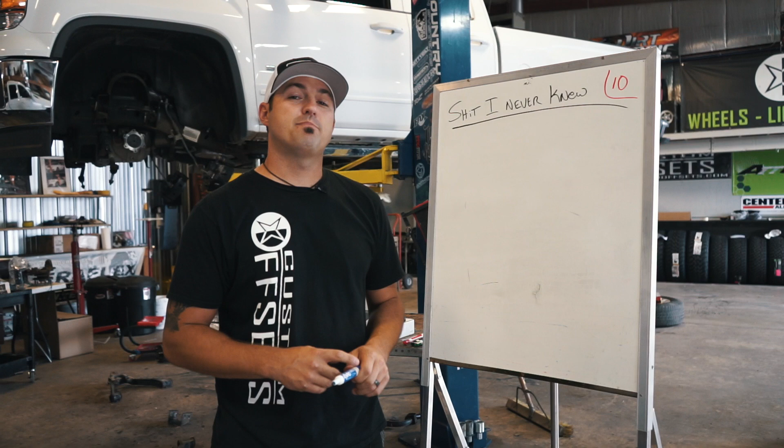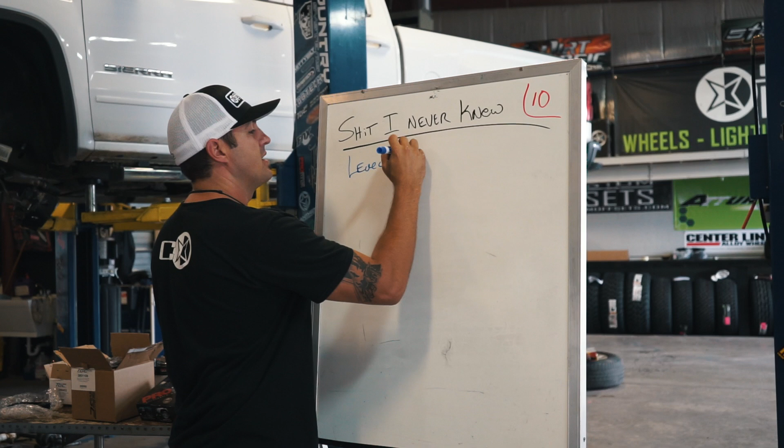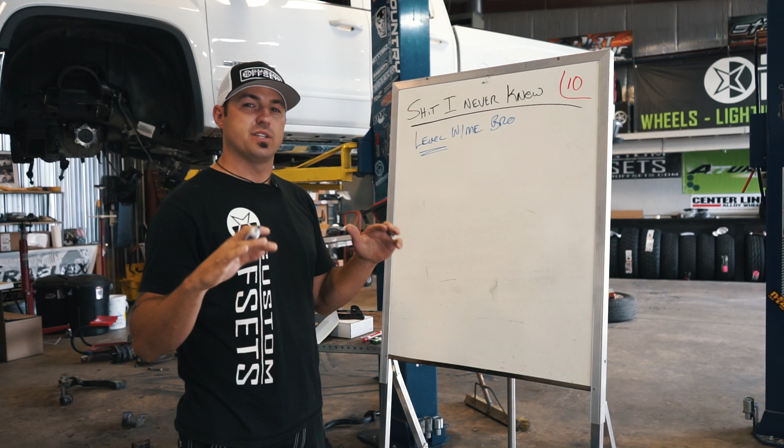So this is episode 10, and we're going to call this one Level With Me, Bro. This is going to be all about level kits. We do a pile of these, and it's been super popular that people are leveling, especially with the Chevy Silverado 1500s, so that they can do 10 wides and 33s with a little bit of trimming. So we're getting a lot of questions around what is a leveling kit, how does that even work, how high can I actually go? We're hoping this is going to help.

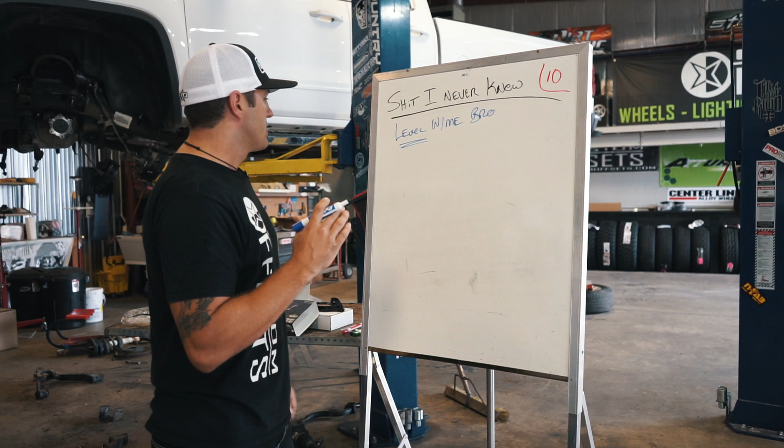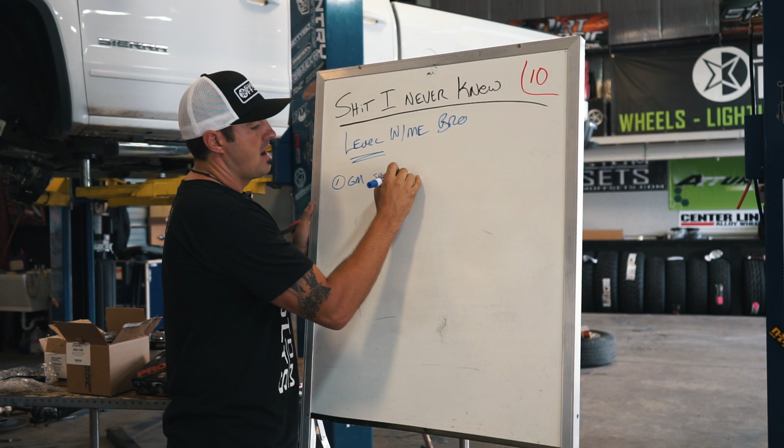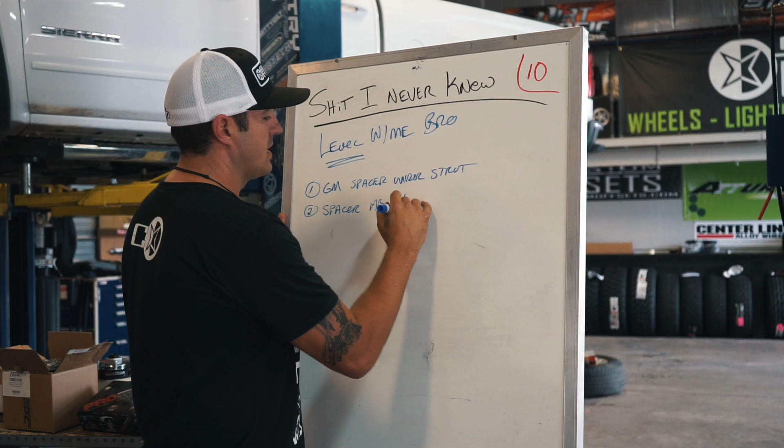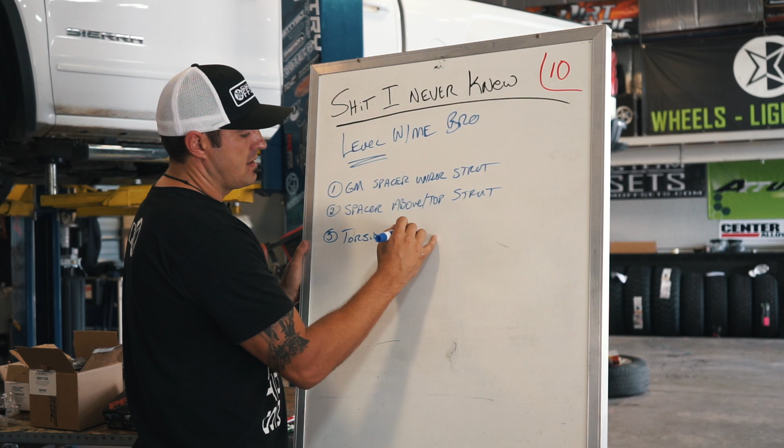So there's probably three major ways to level. One would be just for GM, and it's a spacer under the strut. There's another that's super common in many of them, and that's a spacer above or on top of the strut. And then for the older trucks and a lot of the HD trucks, you're going to have torsion keys. A lot of people call those the duck head style keys. So those are the types.

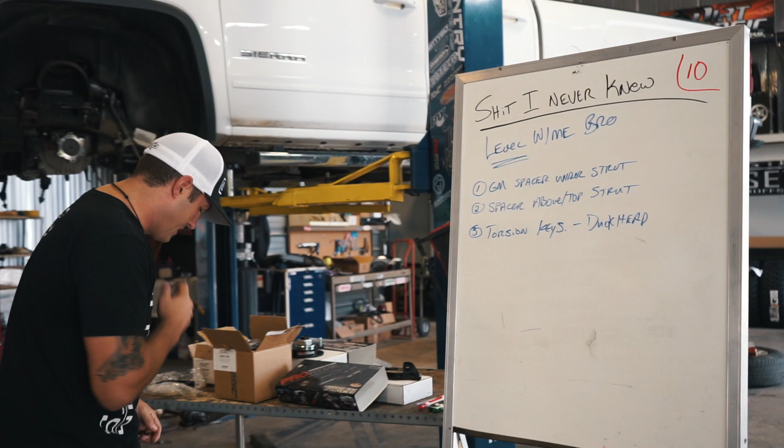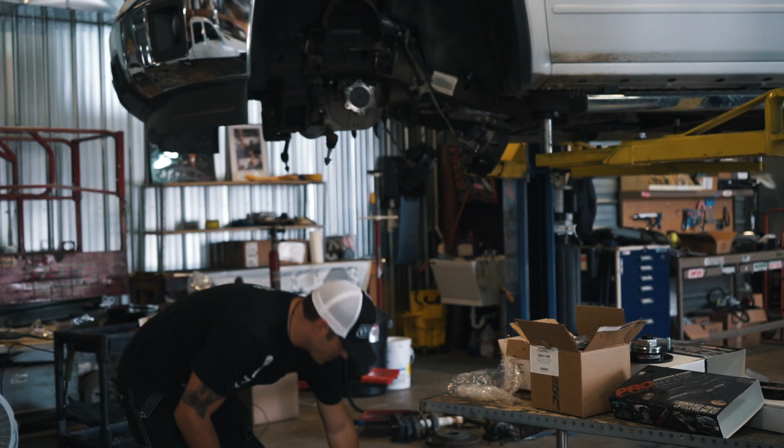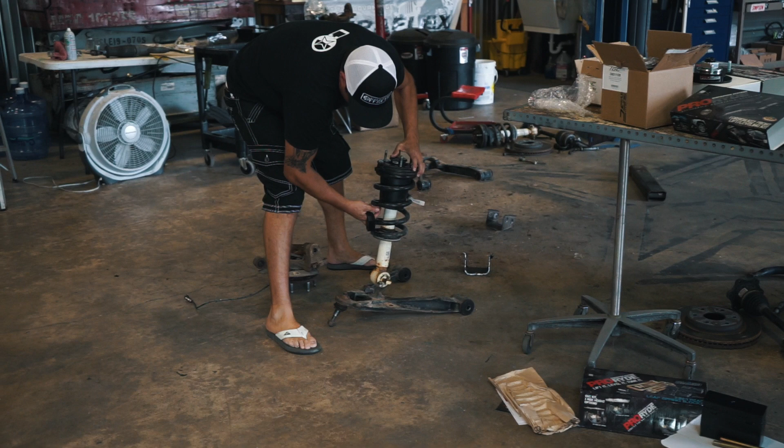Let me show you a couple of those. So this one is from TGC, and you can go on their site if you're interested in snapping some of these up. This isn't something that we're currently carrying on the site, but we use a ton of them here in the shop. They're fairly inexpensive. So these are stacked together, and they go on your lower control arm right here, and then your strut is reattached, and that space it's creating between there is what's going to actually lift that front end 2 inches.

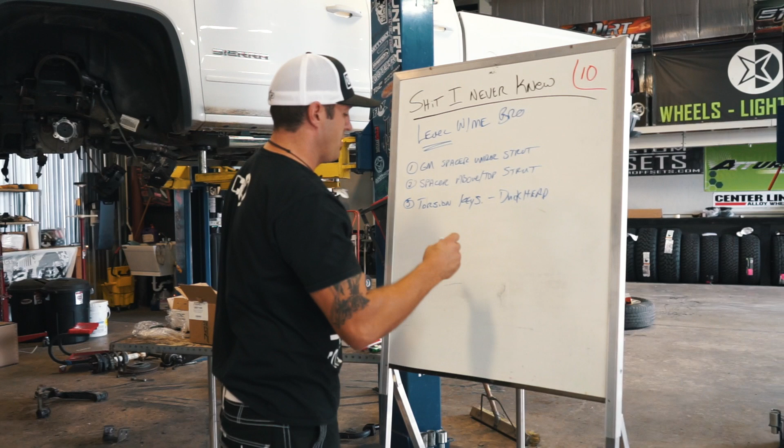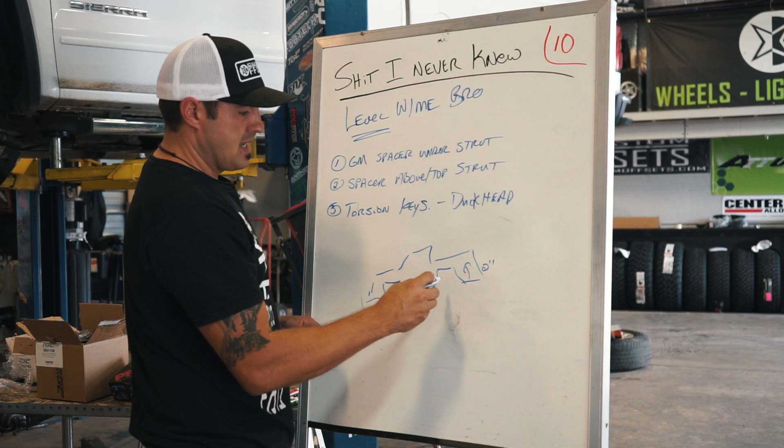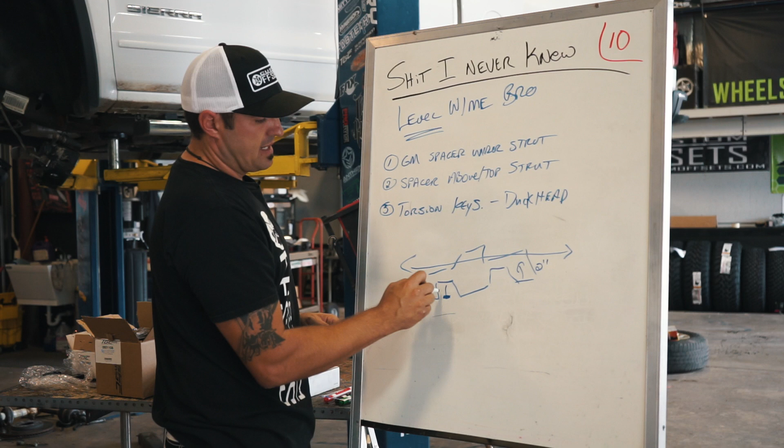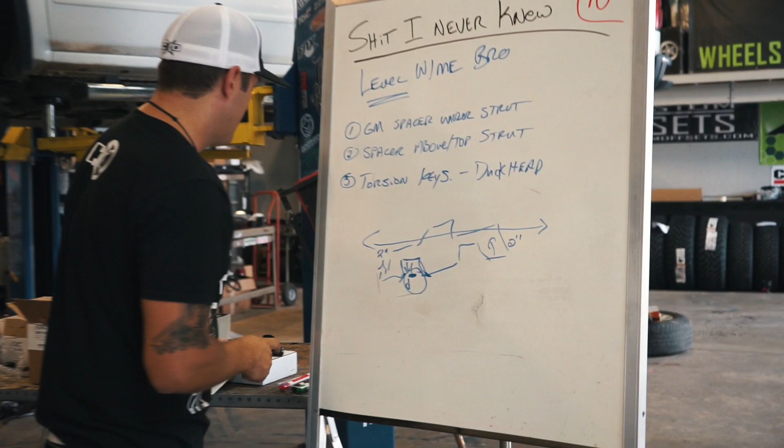That much lifts the front end 2 inches. What that does for a Chevy Silverado 1500 - if you guys have Chevys, you know this, and a lot of the other trucks are like this too, but we do a lot of Chevys - your Chevy with square wheel wells comes with the ass end up about 2 inches. So when you lift up the front 2 inches with that spacer underneath the strut, it basically levels this thing out front to back. It also pushes that wheel and tire down and gets it a little more out of the square wheel well, so the tire going down creates a little more room here and here, so you can go bigger and wider. So that is the below the strut option, that's number one.

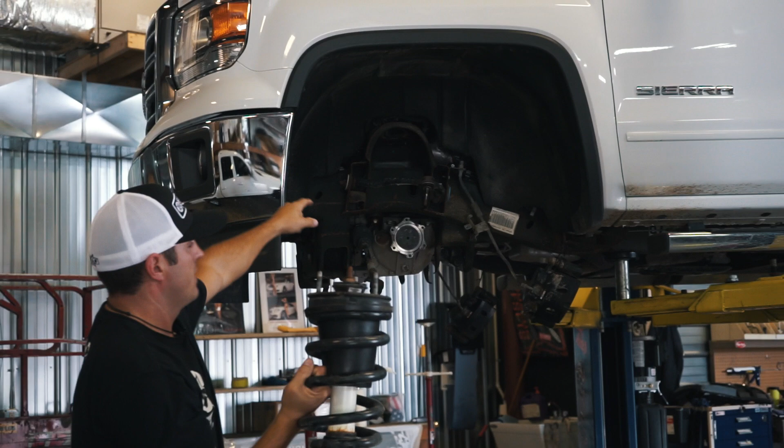The other one, which is super common, same strut - for those that don't know, the strut goes there, it goes this way, so this is the top of the strut, goes into the strut tower. So this one is a strut spacer, and this isn't for this truck, but it basically goes here, and it puts the spacing at the top of that strut, so that again, it's pushing the truck up and away and lifting it up that 2 inches. So that one again is typically a 2 to 2.5 inch spacer at the top.

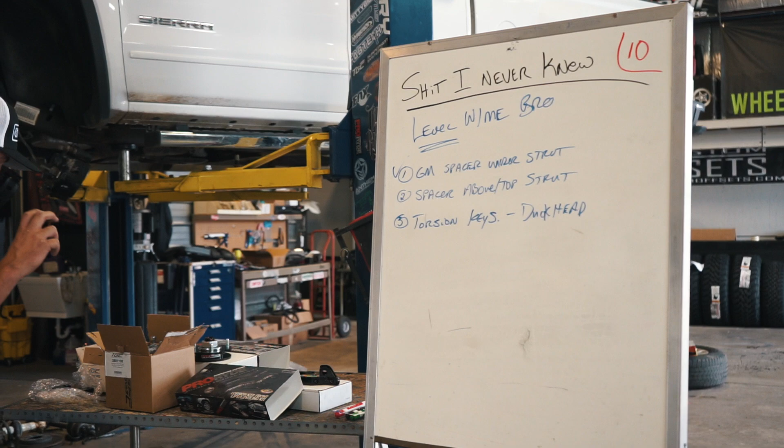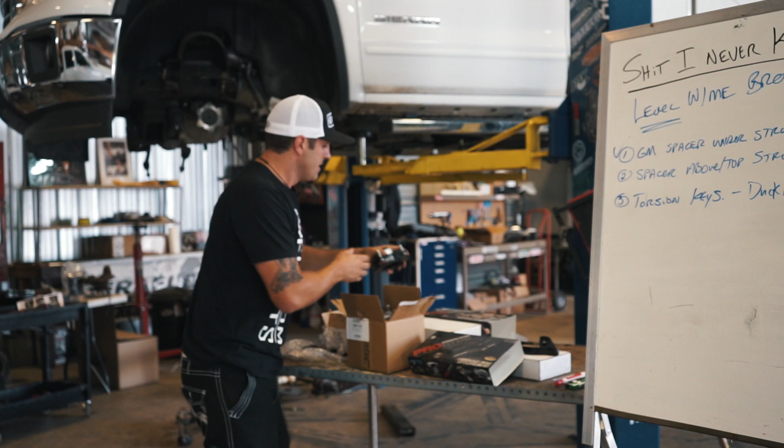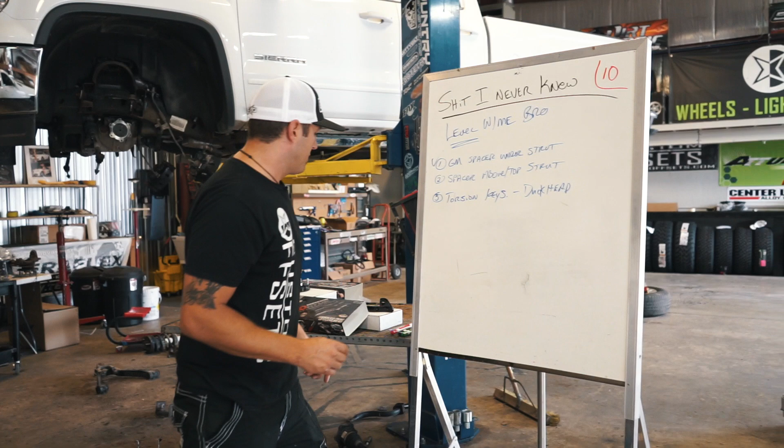ProRide, these guys, you've seen them all over our site, we've used a ton of them. They created one that's adjustable. So what they've done is made this so that you can adjust it, thus being able to change it. So if you wanted to go up 3 inches on the front using this spacer, you can do that versus 2 inches. That's an example of the same one, but this is fixed. As you can see, the ProRide is adjustable and can go up. So if you picture it on top of that one, instead of being on the bottom, it's going on top of the strut. So that covers that one.

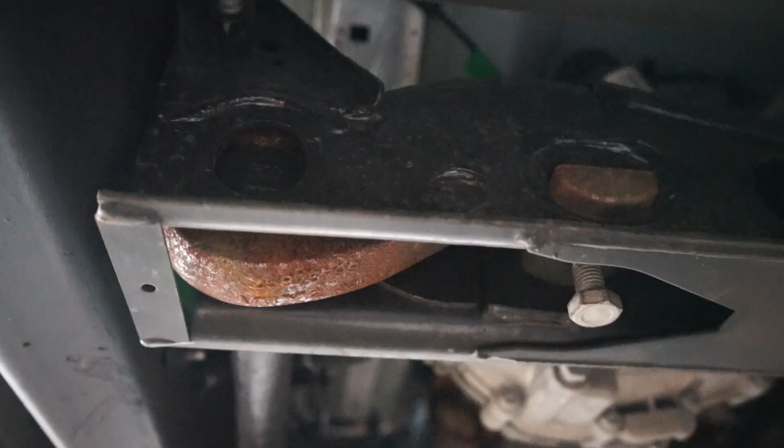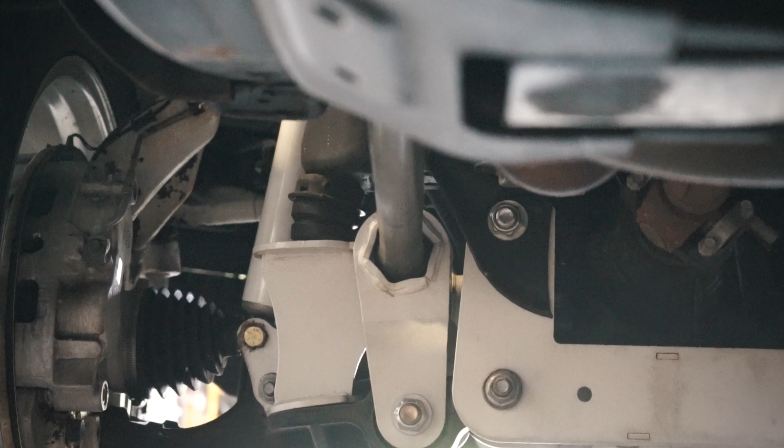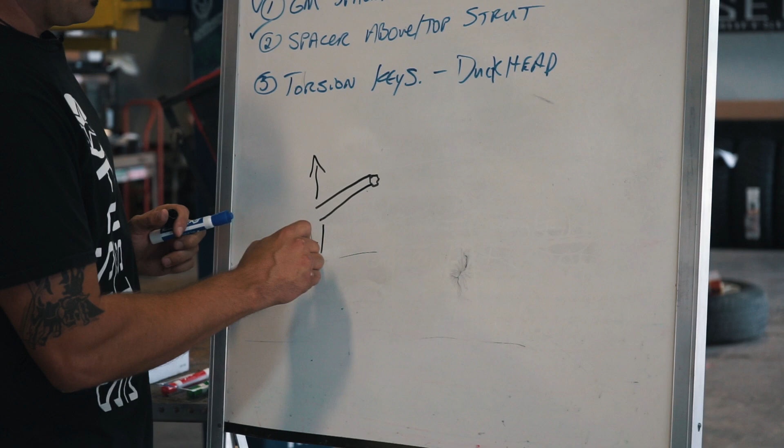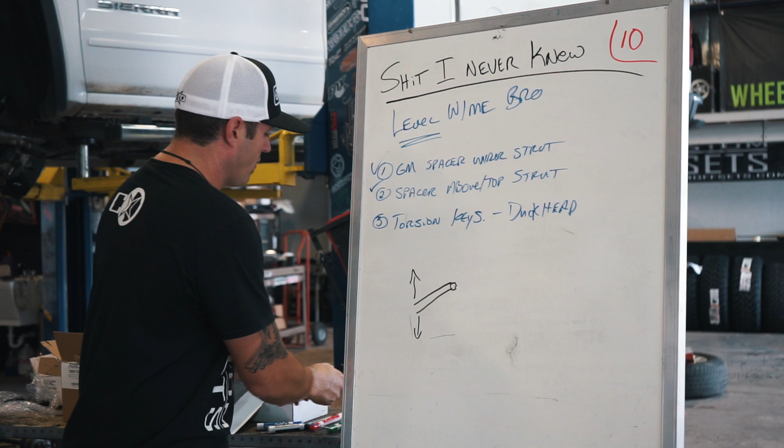This is something that took me a while to learn, because I'm not a very fast learner. But basically what you have is your lower control arm comes out like this, and that torsion bar has a hex design to it so that when you twist it, it moves this thing up and down. So as you crank these torsion keys, which are down inside of there, as you crank them, it twists that bar and then twists this lower control arm, and that's what moves the front of the truck up and down.

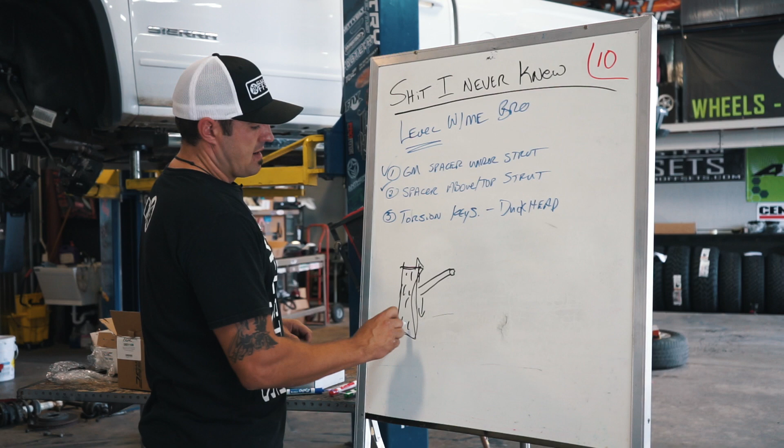As you can imagine, that also moves your alignment. So you got your wheel hanging off right here, your tire - that's what messes with the alignment. That's why you have to have an alignment done every time you have a leveling kit. Any style of these is going to be moving these components, so you're going to have that alignment done.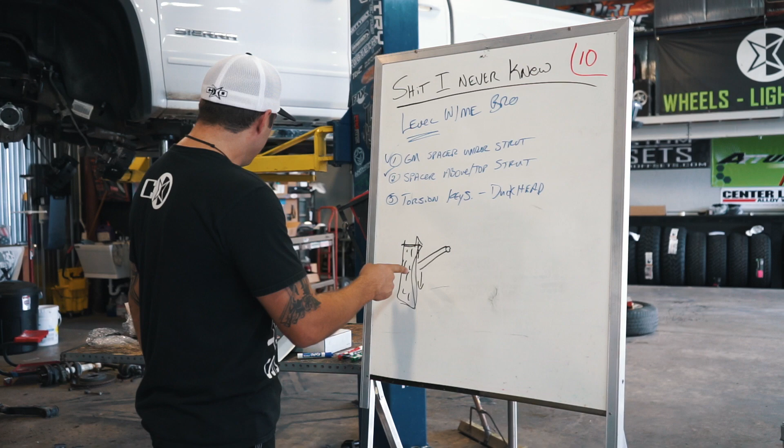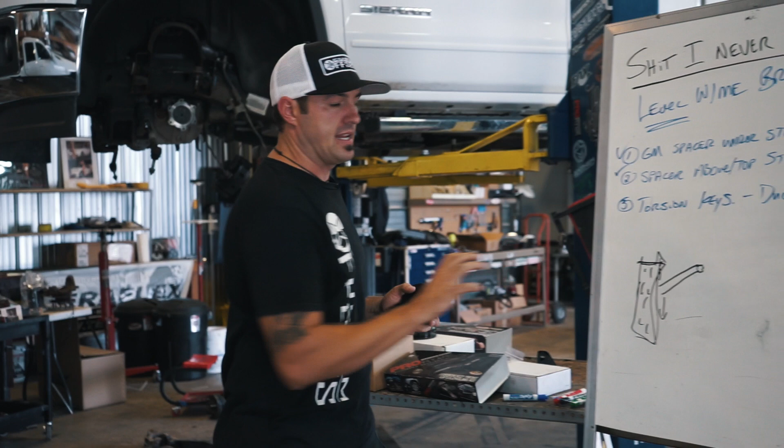But back to the keys. So the key style, instead of being a stock key which has a certain curvature to it, it makes it a more aggressive curvature so that it's already twisting that torsion bar more than the stock one at all times. And this ProRide torsion key kit, it's going to come with 2 different sizes.

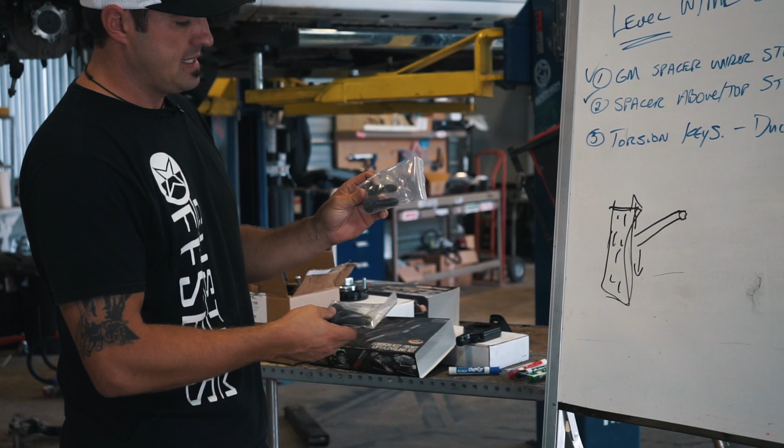So this is for the guy that doesn't want to crank the living daylights out of it. These bolts are for the guy that's going to crank it way up and really raise that front end. I believe this kit goes all the way up to 3 or 3.5 inches. 3 inch, so this will go up to 3 inch.

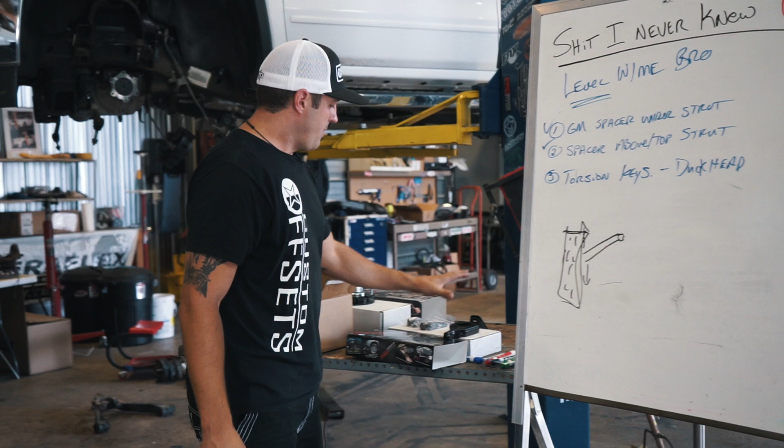You'll see a lot of them that are cheaper than the ProRide, and the reason is they don't go all the way up to 3 inch. I think most of them are 2 or 2.5, 2 to 2.5 inch. So with these longer bolts, you can go all the way up to 3 inch.

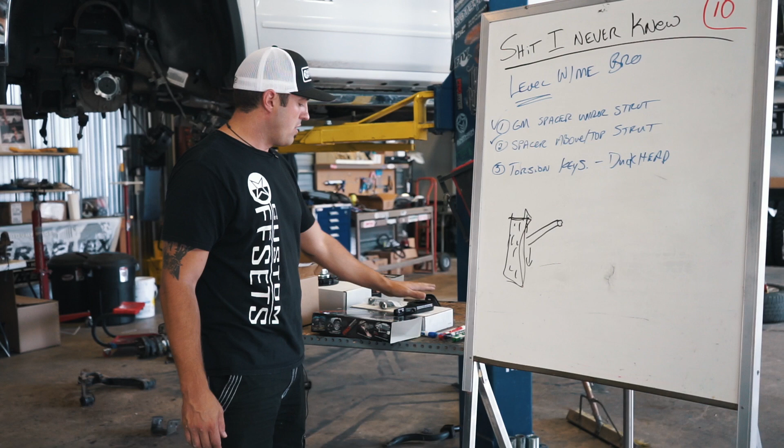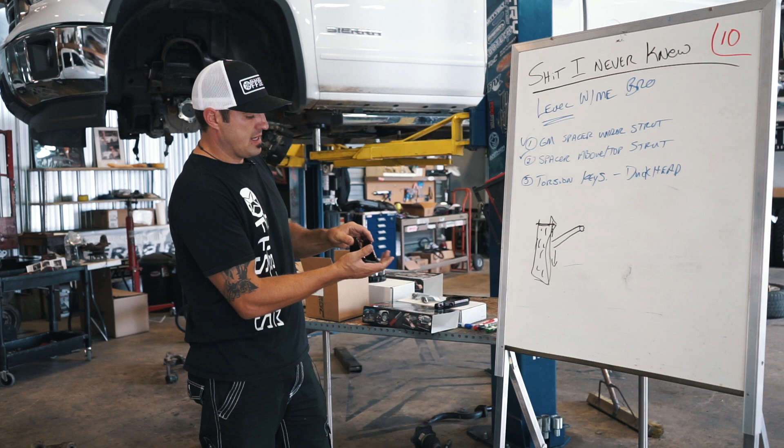The reason, and it also comes with, because it goes up to 3 inch, it's going to come with shock extenders. These go in there, basically between where your shock mounts now and your shock, to extend it so that you don't have that shock completely stretched out when you've got this thing totally cranked.

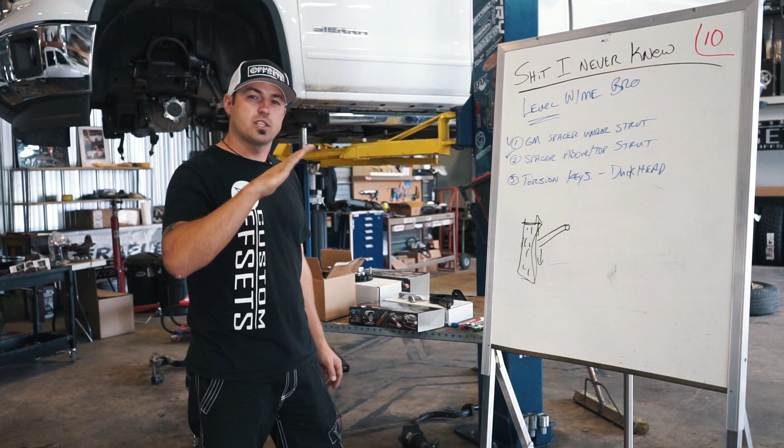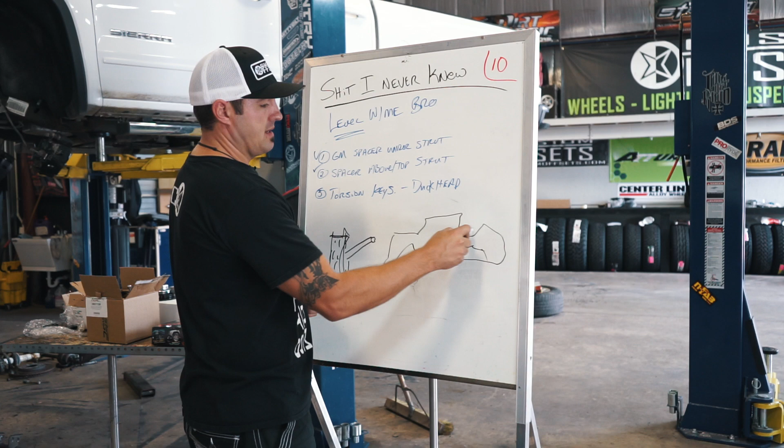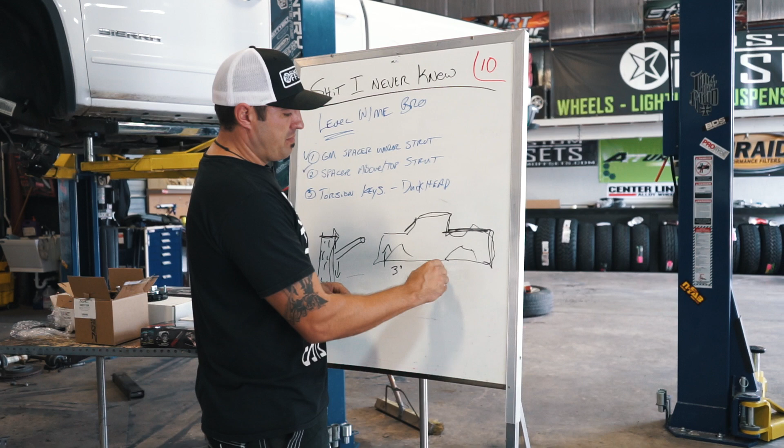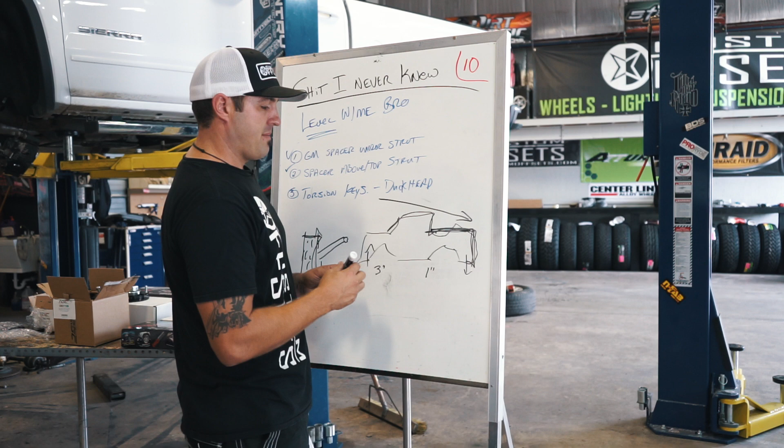If you want that, that's awesome. Over in the Walmart parking lot, that's definitely the thing that's happening right now, and I'm down with it, I'm cool. If you don't want that, you now have to level the rear.

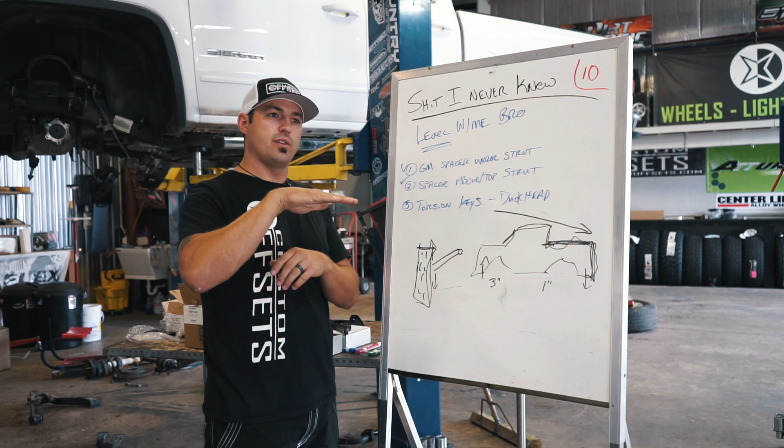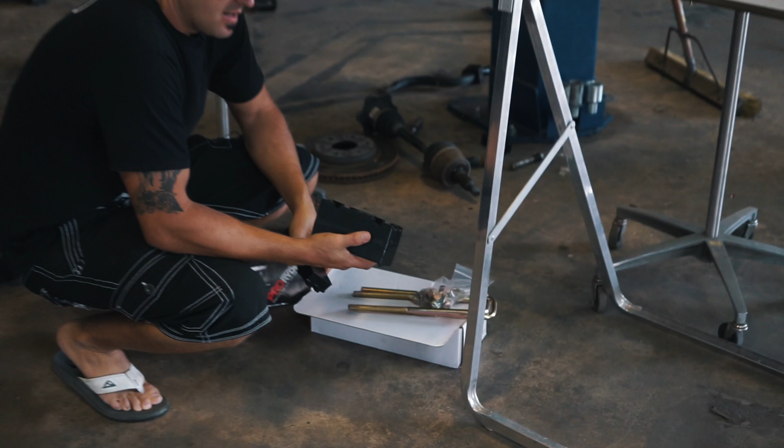So you went from doing a leveling kit to get your front end equal with your rear to going 3 inches where you actually lifted the front. Now you have to lift the rear to compensate. So there's kits like this one, which can go from 1 inch all the way up to 2 inch.

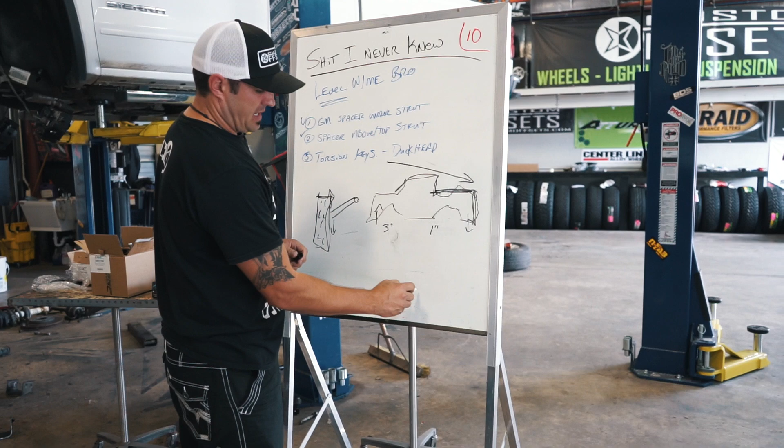So this removes the blocks in the rear. You have your leaf springs. Let's make sure I draw these right, Junior. If you're looking at your back wheel, your leaf pack, we're going to exaggerate, it comes through like this, and your axle is sitting in there, and there's a block on the bottom of that pack.

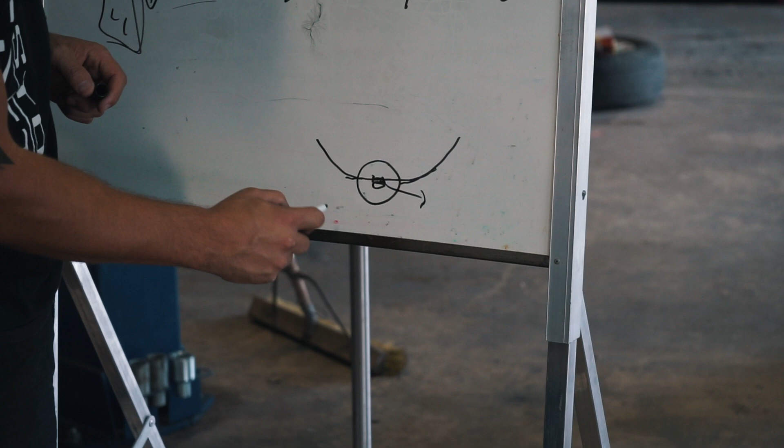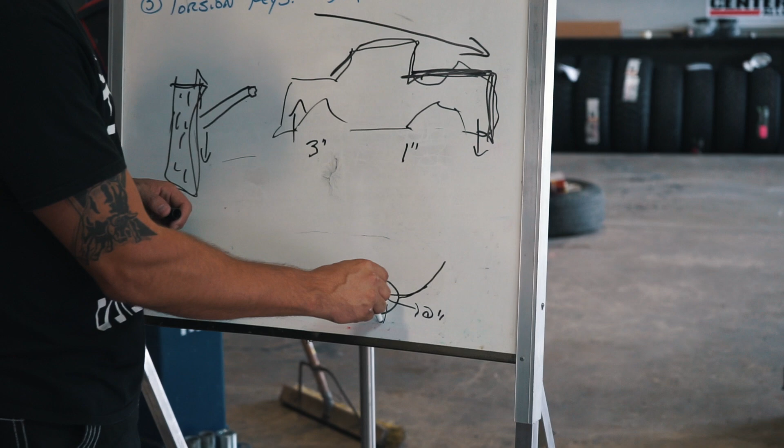So what we're doing is we're removing that factory block, which is 2 inches, that gave you that rake of the vehicle, and you're replacing it with this block that's 4 inches, and stabbing that in there. So now that's pushing your axle down 4 inches, an additional 2 inches, and bringing the ass end up 2 inches.

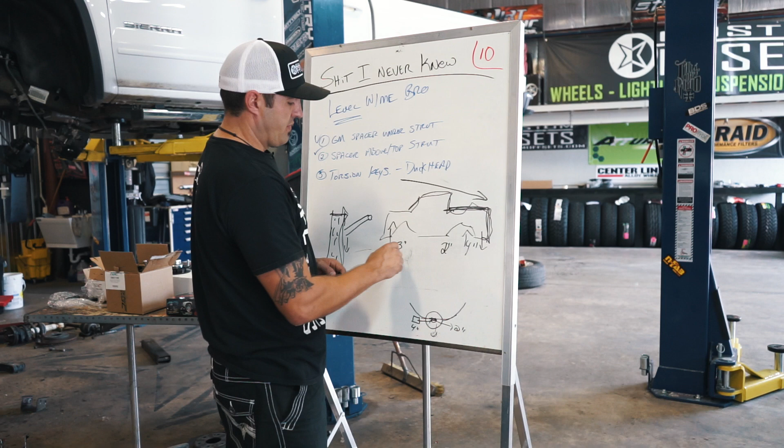So now you're 3 up in the front, 2 up in the rear, which is a total now of 4 up in the rear versus 3. So now you'll have 1 inch of rake. So instead of the Carolina squat, you will be back to ready to tow.

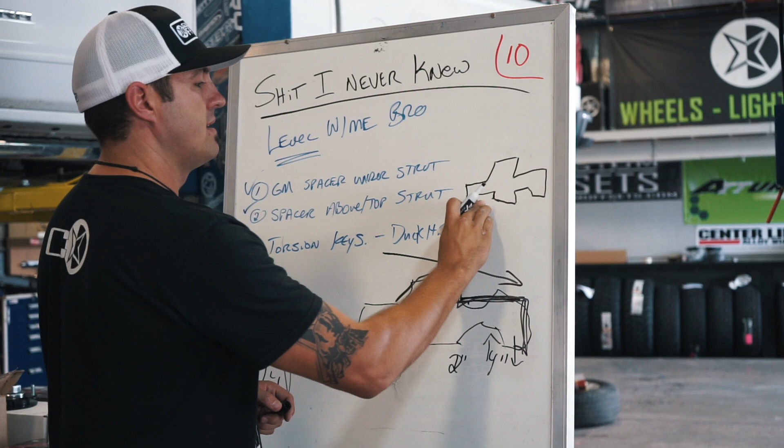Junior, I don't know what's going on. You'll be back to ready to tow, where the ass of the truck would be up 1 inch in the back. You'd be up, so you'd have that rake again.

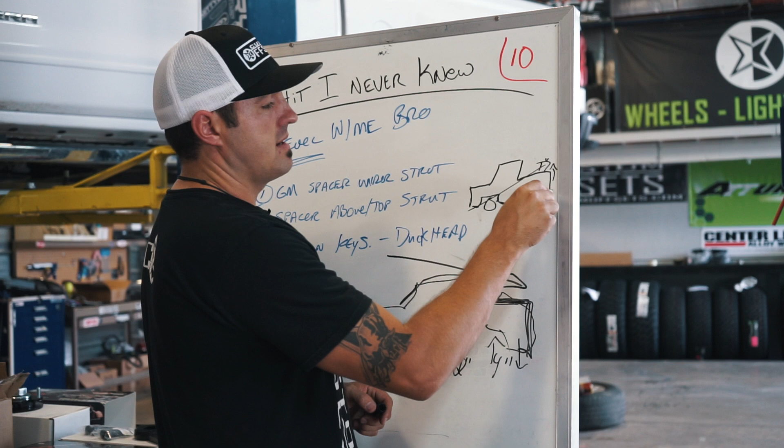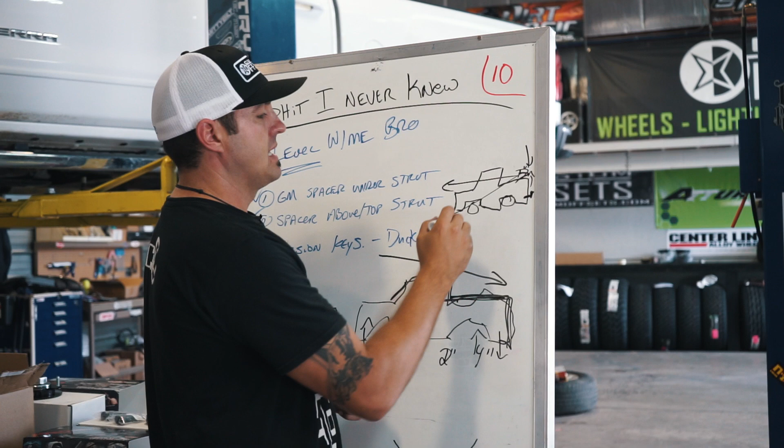And the reason they do rake on vehicles, in case you never knew, is so that when you hook a load, your trailer, your camper, your jet skis to the back, and it pushes down on the truck, it still remains fairly level and doesn't start lifting your front tires up off the ground.

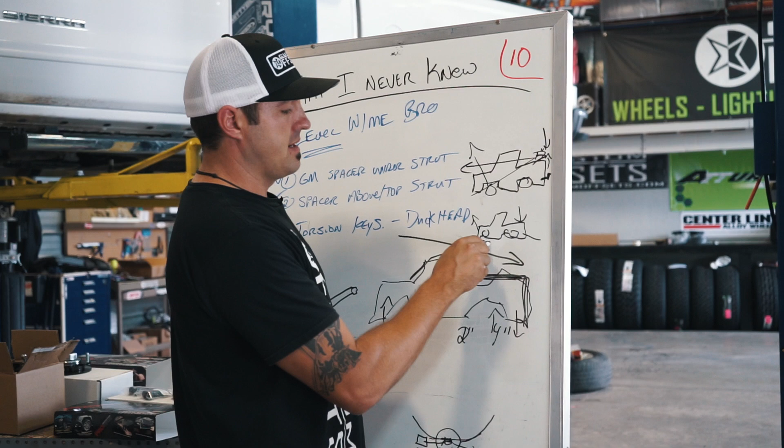Because if you've got a leveled truck, just picture this, you're all leveled out and you borrow Grandpa's 40-foot trailer and you load that thing down or fill it with a load of gravel, you're now one of those Carolina squat kids. Your whole front end's up in the air and your steering becomes pretty light because you're taking basically the front end of the truck off the ground.

I'm exhausted, Junior. I think...

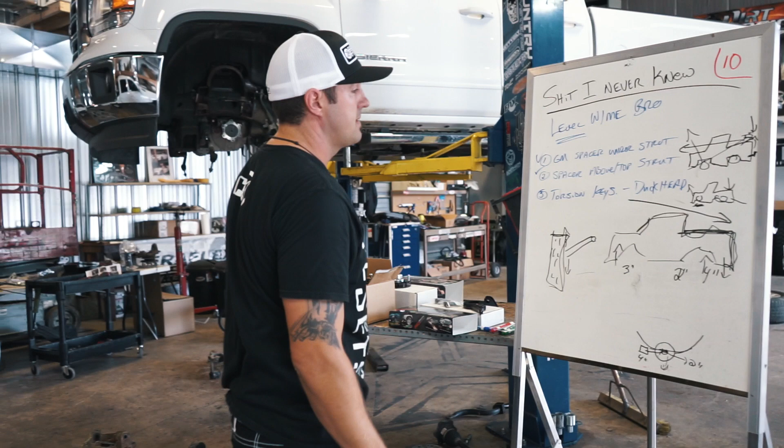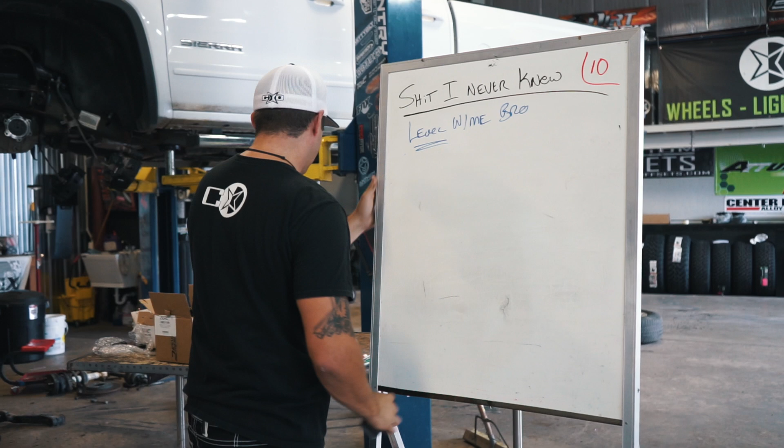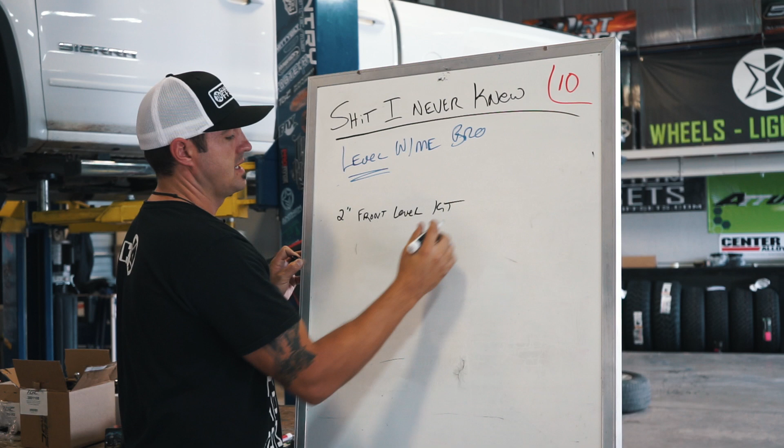That's everything I know. So let me make a point. The most common thing people are doing is they're coming into our shop or coming onto our website and they're buying a 2-inch front level kit and then an alignment so that they can put 20 by 10s and 33-inch mud tires on their Chevy.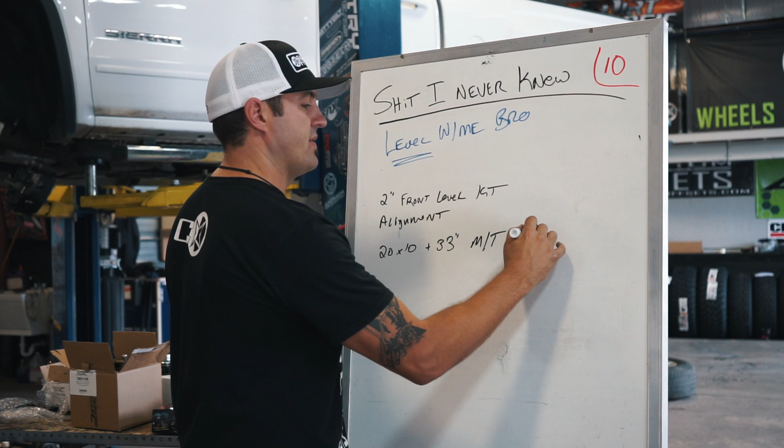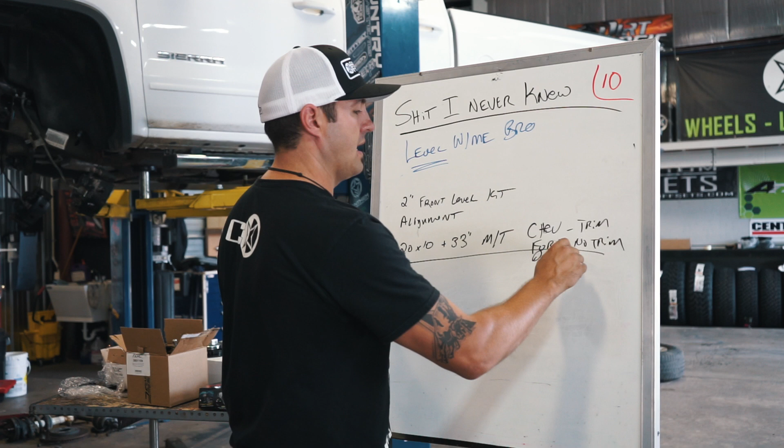Some of the other kids are getting the same thing for their Ford. So this would be quite a good amount of trimming still. This would basically be no trimming, just the valence. A Dodge fits all freaking day, no trim.

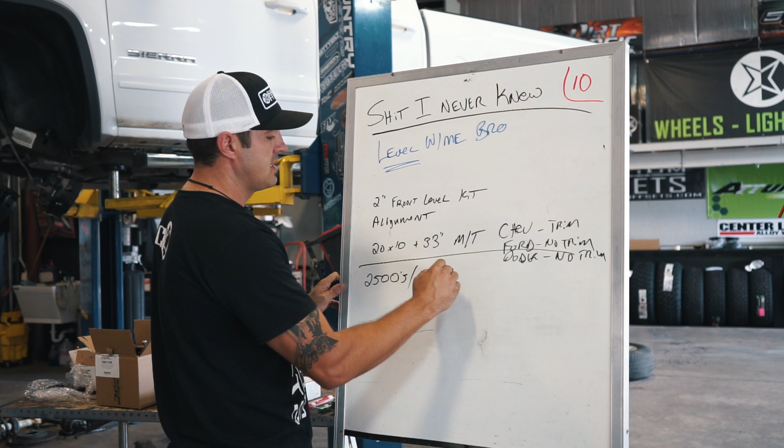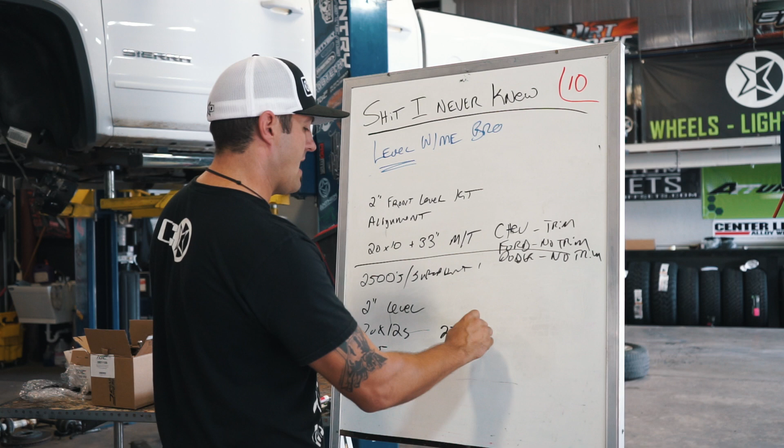Some guys will even go, they'll take their 2500s, especially the Dodges and the Super Duties, and they're doing a 2-inch level. And then they're putting 20 by 12s and 33s, or they're doing 20 by 10s and 35s.

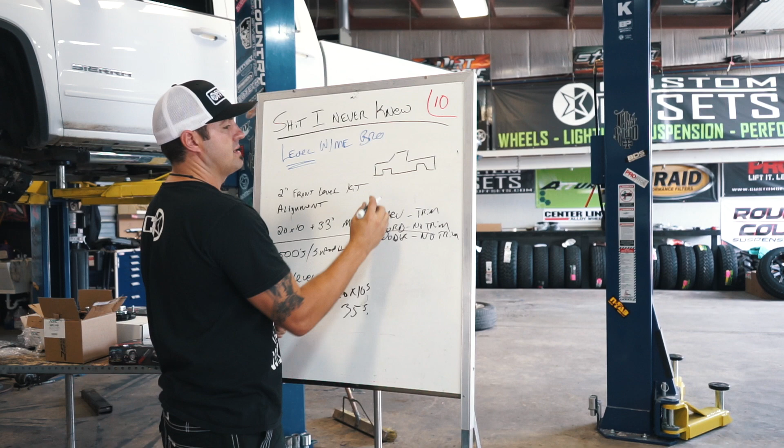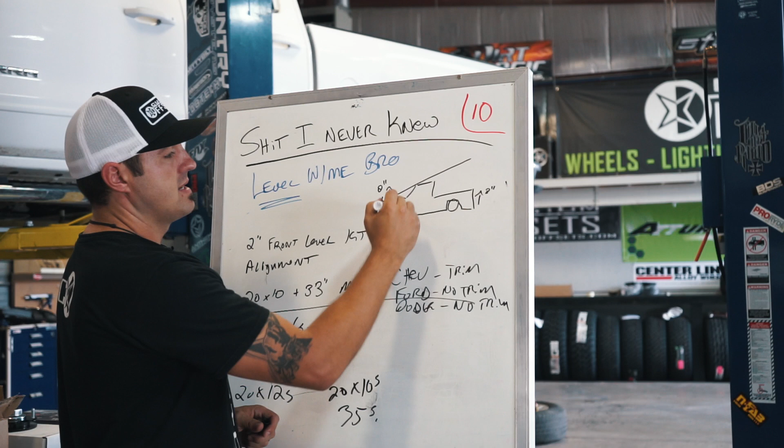And that's why they're doing the level, because you started off with a truck that looked just like Grandpa's, where the back end is 2 inches up, so it's got this kind of look to it. And they're basically bringing up the front end 2 inches, creating more space, putting the wheels down here. That wheel stays put. Now you've got your clearance so that you can put those bigger wheels and tires in there.

That's level with me, bro. Peace.